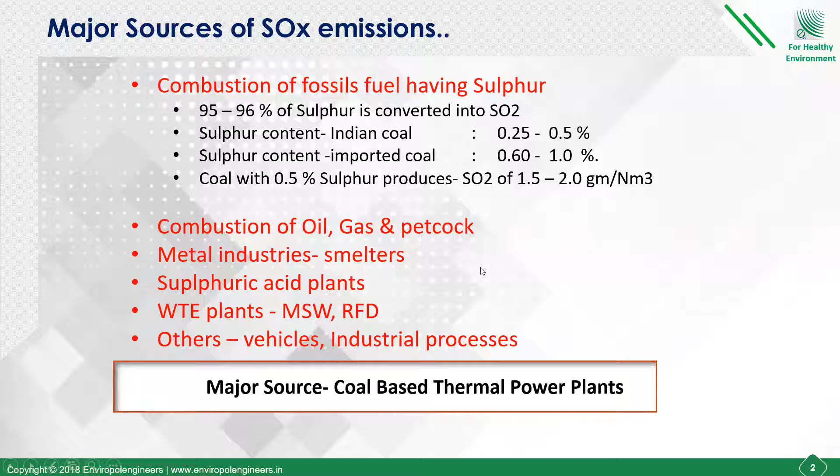The main sources, as I told you, are combustion of oil, gas and petcoke, metal industries from smelter plants, sulfuric acid plants, waste to energy plants firing municipal solid waste or refuse derived fuel. Another source is vehicular pollution and industrial processes.

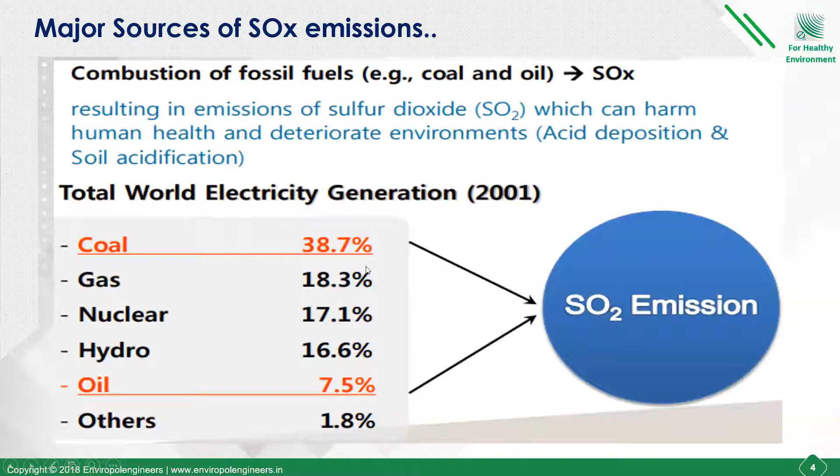And out of this combustion, the major source is coal and oil, which constitutes about 50%, a little less than 50%, around 45% of SO2 emissions in the atmosphere.

Now, how are these SO2 emissions affecting our health or humans? If you see the effect on environment and on human beings from these SOx emissions, you will be surprised that it creates a lot of diseases, a lot of irritants in the human body, and also spoils our monuments and all.

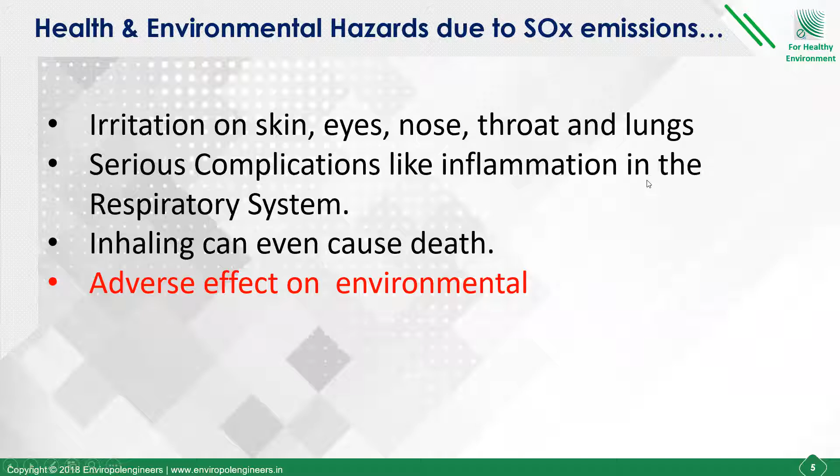The major diseases are irritation of skin, eyes, nose, throat, and lungs. Serious complications are also there in the respiratory system. Inhaling can even cause death if you inhale more than the desired quantity.

It also has an adverse effect on environment. You can see how acid rains occur because of SO2 emissions from the plant, and that spoils our soil, spoils our water table, and has multiple effects on environment.

On human health, if you see the SOx and NOx emissions, both are creating a lot of issues with respect to respiratory illness and cardiovascular illness also.

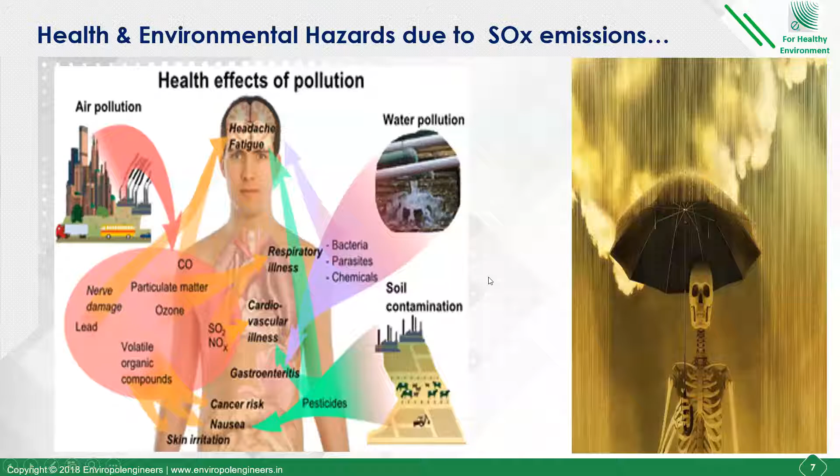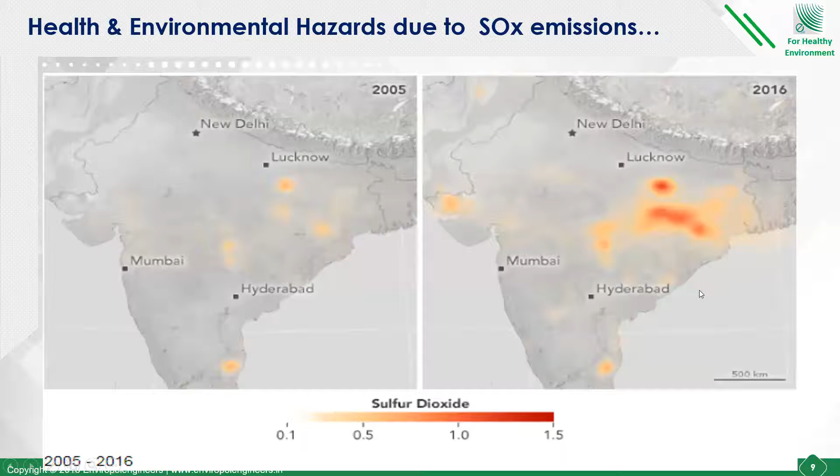If you look at the condition from 2005 to 2016, this data is up to 2016 with me right now, you can see how SO2 spots are increasing, particularly in the eastern part of the country, where there's a cluster of power plants, coal-based thermal power plants, steel plants, the big power generation units. So you can see how from 2005 to 2016 we have progressed on SO2 emissions.

And if we have created this, we have extra responsibility to curtail this and give back the same planet as what we used to have. So the onus is on all our industrialists, all the technology providers, and all technologists to attack this problem and resolve it.

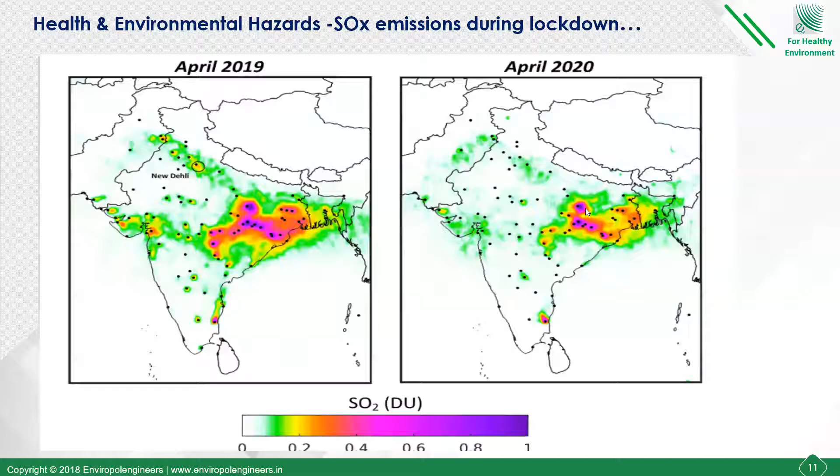Please put your video on, that would be better for us to communicate. I'm seeing a couple of friends from overseas, a friend from Vietnam - thank you, Swain. And from Thailand - thank you, Thitiwat, and all for joining. I know it is an odd time for you in Vietnam, Thailand, and other places, but still you are joining. That shows your willingness to learn new technologies and gain knowledge.

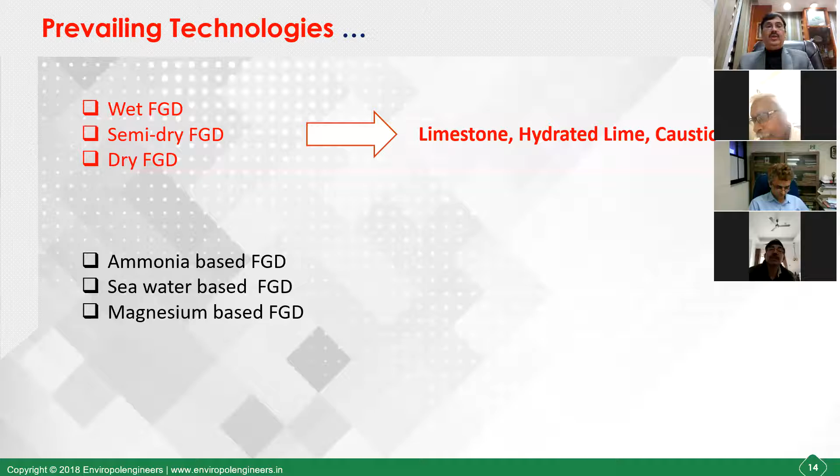If you look at the numbers or stats of type of FGDs all over the world, you find that wet FGDs contribute to about 87% of total installations worldwide, whereas 11% are dry or semi-dry, and 2% are others. On the reagent or sorbent side, 55% is limestone based, 33% is hydrated lime, and 12% is others - others includes caustic, magnesium, or any other sorbent. This is the stats of the world scenario at a global level.

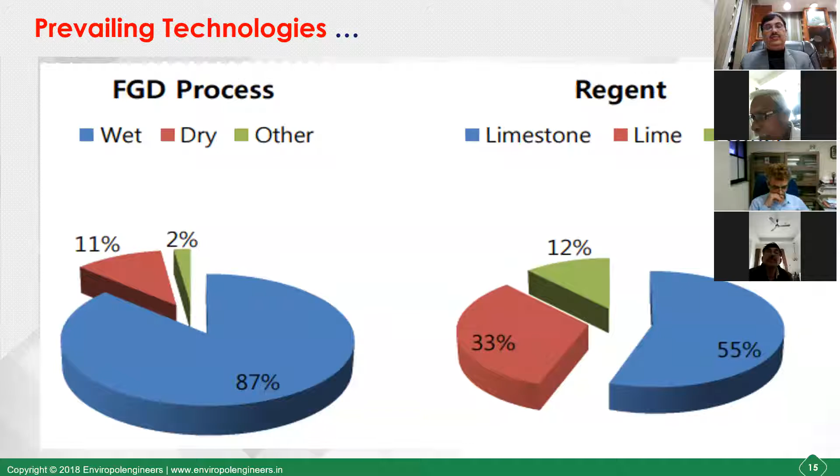If you look at the technologies at a glance and do a basic comparison, you find that wet FGDs are used wherever you need an efficiency of 98% plus SO2 removal, wherever high sulfur fuels are used with coal containing 1.5% or above and a blending of different fuels, and wherever you need a marketable byproduct, because wet FGD is the only system which produces gypsum as a marketable byproduct. Most of these wet FGDs are designed on limestone.

Whereas the other semi-dry type of system is a basic system called SDA, spray dry absorber. Here the efficiency is 95% plus, and it is usually used for fuel having less than 1.5% sulfur content. The dry product goes to landfill, and it normally uses hydrated lime.

The upgraded version of semi-dry technology, which is the most versatile, is called the circulating dry scrubber, or CDS. This is the most popular type of system in semi-dry technology, which can have efficiency as high as a wet system, that is 98% plus. It can be used for high sulfur content fuel. It also has lower consumption of sorbent because of recirculation of sorbent back to the system. The dry product is again landfill, same as the SDA, and this also uses lime or hydrated lime for absorption of SO2.

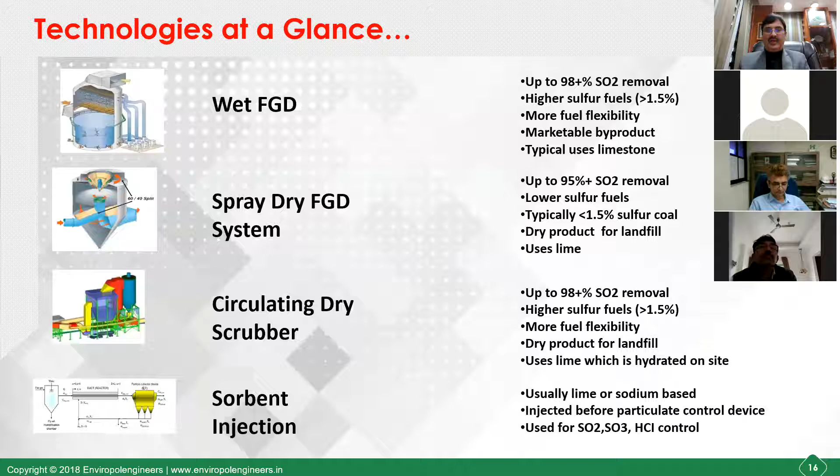So this is the very basic comparison of these four types of systems. But when you really sit with this, it is very difficult to select which one to use where. It looks very simple, but when you work it out for a particular plant, there are so many variables that come into the picture and create confusion among users about whether to go for wet, dry, or semi-dry. So we are trying our best to reduce or minimize that confusion today, so that your selection criteria becomes very clear.

So I would just give you a little bit of the brief about every technology, especially on wet.

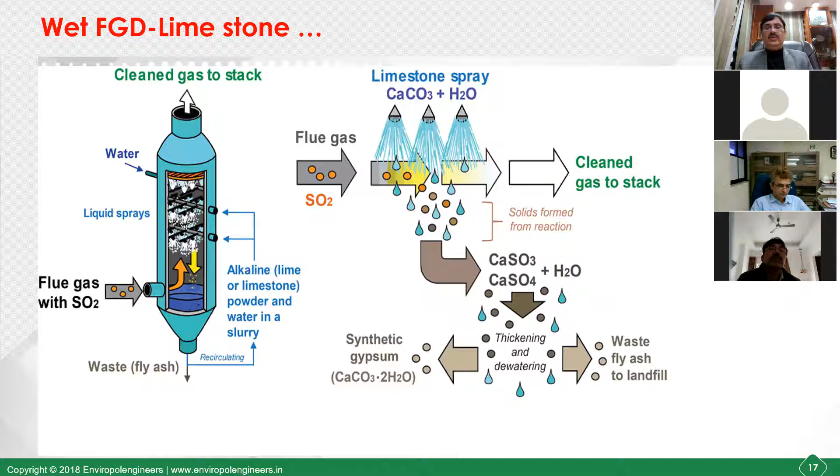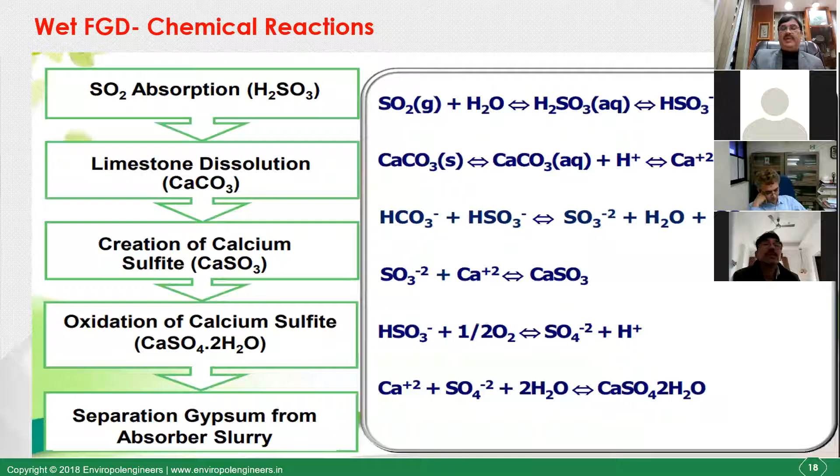If you look at the chemistry step by step, you can look at these equations. First is the absorption process, where the SO2 reacts with water and gets converted into HSO3. Then there is limestone dissolution which takes place in the form of CaCO3, the limestone, and then creation of calcium sulfite, CaSO3, is formed. Then CaSO3 is converted through oxidation in the bottom chamber, which is called the oxidation chamber or reaction tank. After the oxidation, the gypsum is separated and dewatered through a dewatering system, becoming a saleable product for you, and the clean gases go to the demister and back to the stack through a booster fan.

So friends, if you see the absorber chemistry, it is very simple. That limestone, the calcium CaCO3, is reacting with sulfur dioxide, converting into gypsum. That is the crux of the whole chemistry.

But if you look at the finer point of this equation, you find that particle size of the solid limestone particles is a very important criteria here. The finer the particles, the better the reaction, because you get more surface area for absorption, correct? And then reactivity of limestone, that is nothing but the percentage or purity of CaCO3 in the limestone.

That gives a better dissolution. And the pH value of the absorber slurry, you need to maintain a certain pH value in the recirculation slurry system. The lower pH leads to faster limestone dissolution, but at the same time, higher pH also creates problems of scaling and other things. So there has to be a perfect balance, and this is one of the most important control parameters of operating a wet FGD system.

So if you look at this, high pH value is good for the absorption efficiency, but at the same time, the dissolution rate of the regenerated limestone reduces and also creates scaling issues in the system, correct? Whereas the low pH value is detrimental to removal efficiency, but beneficial for limestone dissolution. So these are two reverse things against each other.

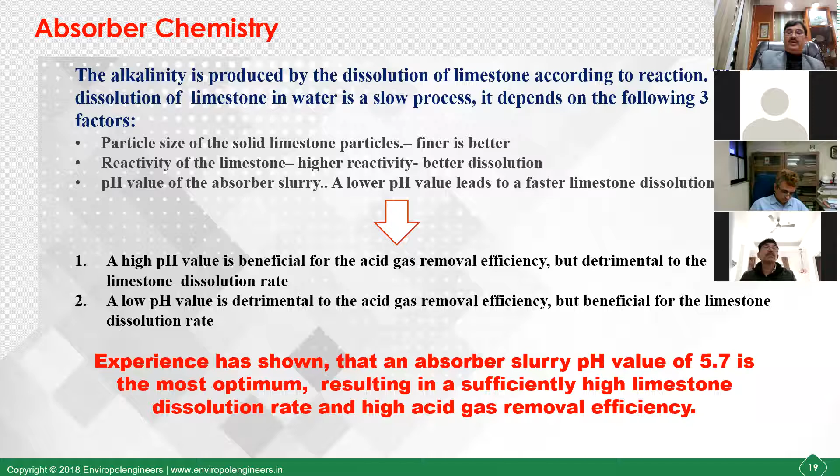So I hope you are clear on this. Let me take you to the wet FGD system components, or what we call islands. One is the main unit, the absorber, which is normally made of rubber-lined carbon steel or glass flake lining because of the pH, or sometimes duplex steel, depending on the budget and the life expected from the system.

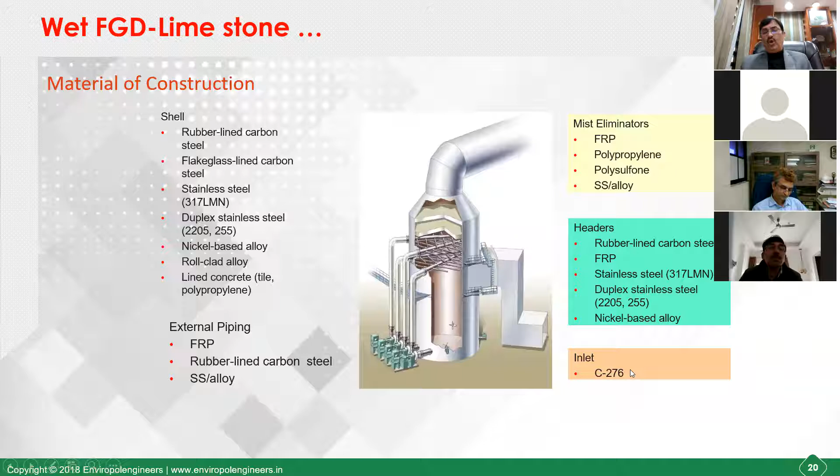And then pipings are normally in non-metal or high-grade SS. Mist eliminator can be in FRP or high-grade SS. Similarly, the headers, and normally this Hastelloy is being used in all the projects of NTPC, the Hastelloy lining, which is called C276, a very costly material. But for the life, the Hastelloy lining is being used in the absorber.

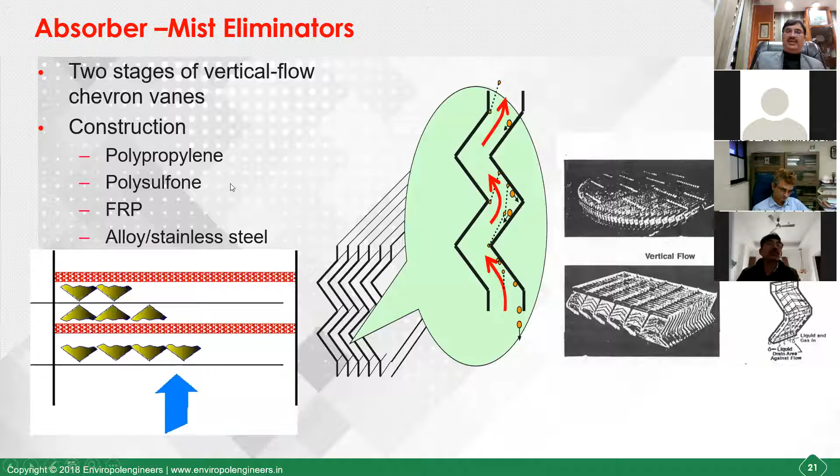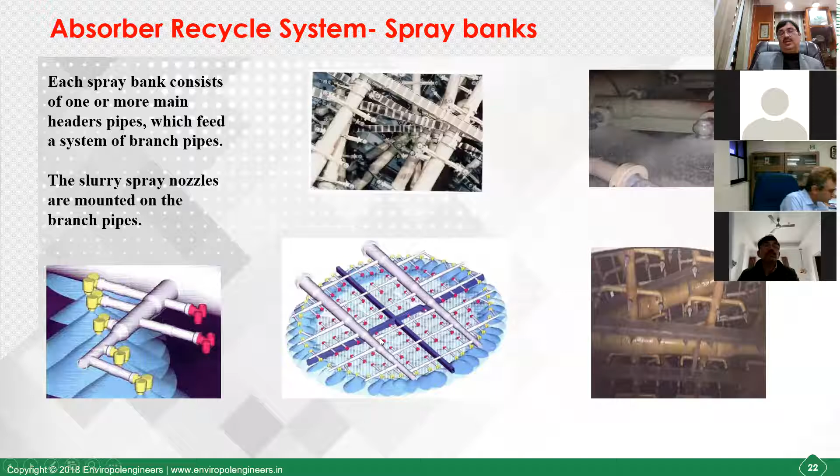Normally, after the ESP, after the particulate matter is removed from the gas stream, a booster fan is used, and the gas goes to the absorber, and from the absorber it goes to the chimney directly through the demister. And the bottom part has a reaction tank, which is the absorber tank, where we maintain some retention time for the reaction to take place for proper conversion and crystallization of the gypsum material.

So normally 3 to 5 minutes of retention time is required here, and this is pumped to the hydrocyclone for dewatering, followed by a horizontal vacuum belt filter for removal of gypsum, or dewatering of gypsum and disposal of gypsum.

And then the filtrate from this is taken back to the absorber tank, and there is some amount of air present here, called the air oxidation blower. The air is given for oxidation purpose to convert CaSO3 into CaSO4 and then into gypsum. Some amount of this slurry is taken to the bleed, and the parameter which controls the amount of bleed is the chloride content and the solid content in the recirculation path.

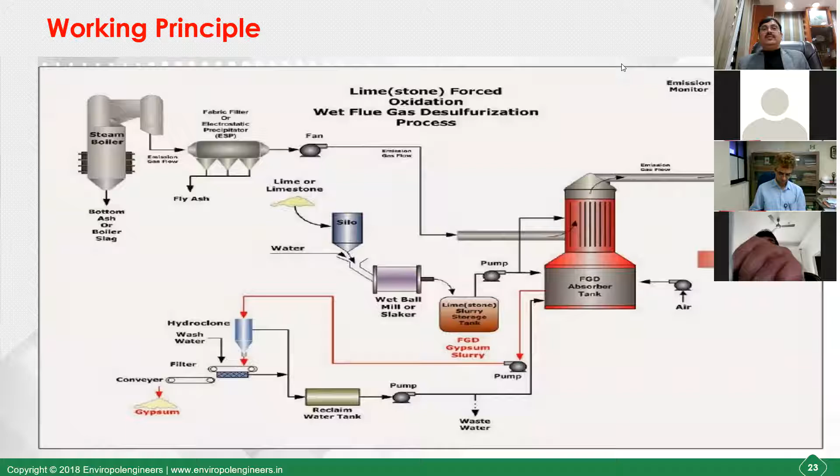So if you look at the individual island, the first is the reagent preparation island. As I showed you, it has got a day bin, a ball mill classifier, ball mill, and then a feed tank for preparation of slurry. Normally a 20% solid concentration slurry is prepared and fed into the absorber tank as a regeneration of the existing slurry.

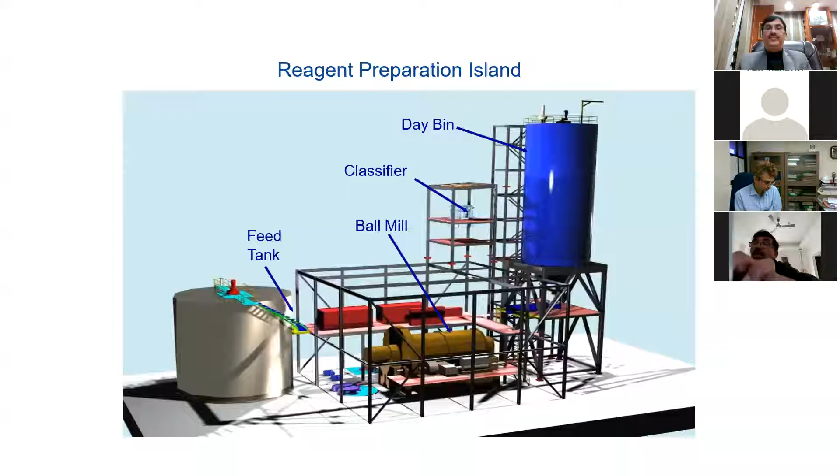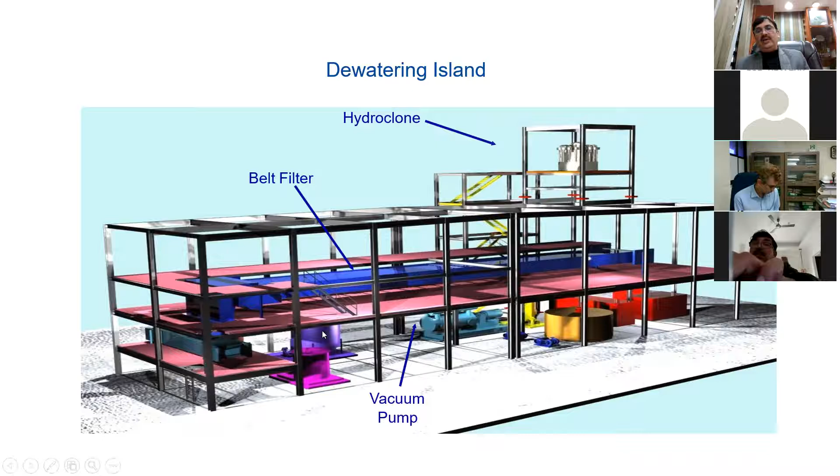Coming from the scrubber. The other islands, one is the absorber island, one is the reagent preparation island as I showed you, and the third island is the dewatering island, which dewaters the gypsum and then disposes it off through an HVBF belt system, vacuum belt system, and hydrocyclone.

As you know, there are multiple uses of the gypsum which is sold in the market. It can be used for wall board, cement, plaster of Paris, soil conditioning, and as a hardening retarder in Portland cement. So multiple uses are there, but it depends on the quality of gypsum you are producing, and the moisture content of the gypsum. Accordingly, the price in the market is decided.

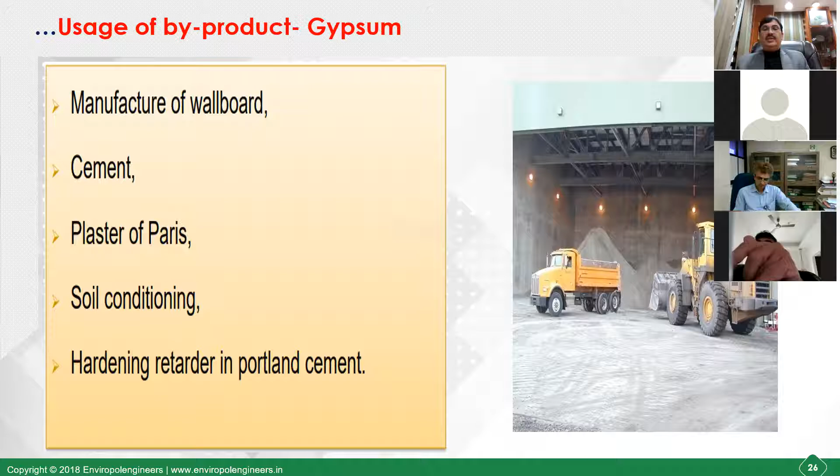And if you have a good quality, you get a better return, which can compensate some amount of your capex over a period of time.

And as regards the control system of the whole wet FGD, first is the wastewater treatment. As I told you, the control of solids as well as the control of chloride defines the wastewater treatment quantity, or the bleed.

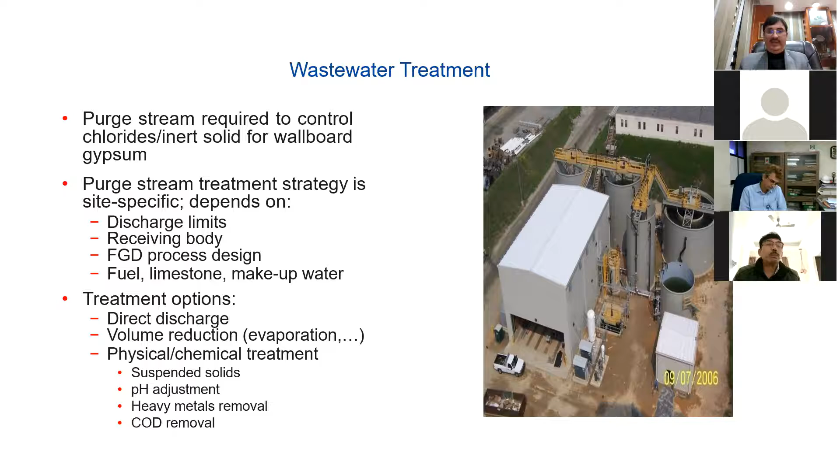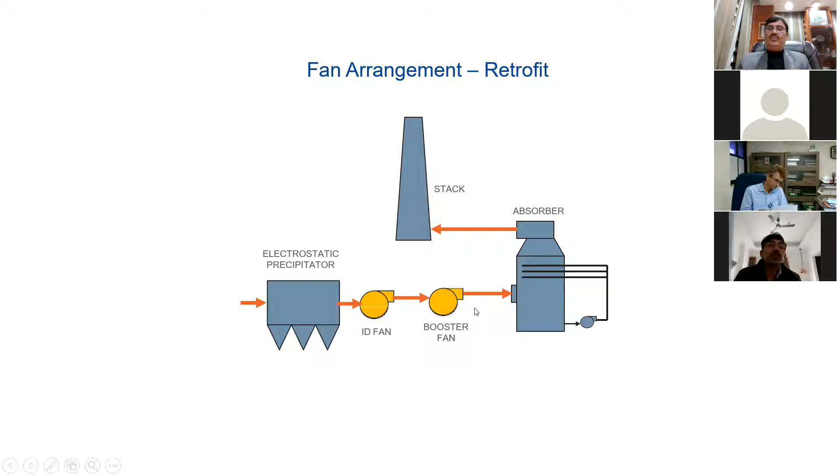On the control side, you have a dedicated DCS or PLC based system normally. The control points are: first, draft control using a booster fan, so that your boiler is not affected because of the extra pressure drop created. The fan can be before the absorber or after the absorber, depending on the layout and many other factors. The location of the booster fan is decided based on these.

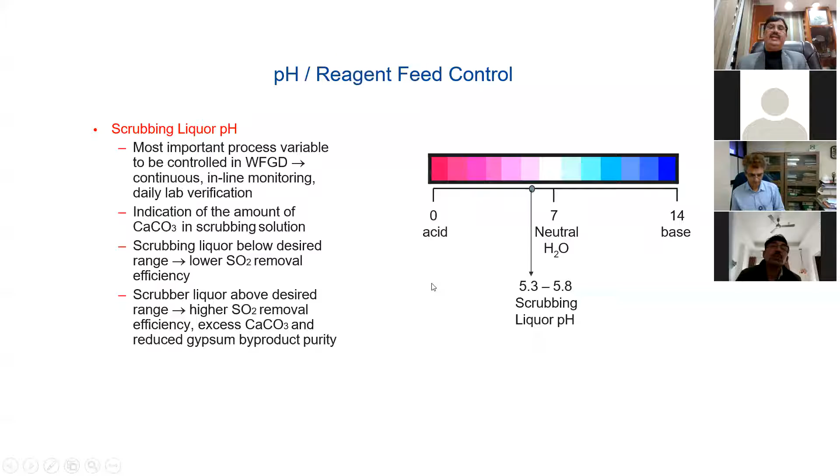Then you have scrubbing liquor pH control, which is a very essential and critical component of the whole wet FGD system. You have a set parameter of 5.3 to 5.8 pH, maintained by controlling the recirculation rate and the rate of regeneration agent. And then you have gypsum bleed solid control.

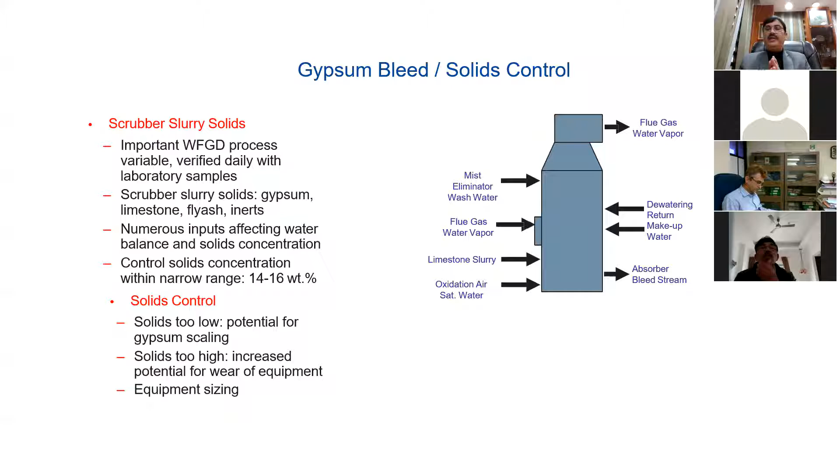If solid is too low, there's potential for gypsum scaling. If solid is too high, this increases the potential for wear and tear of the equipment. So there has to be a specific range of solid concentration, which varies from 14 to 16% by weight. This solid concentration is to be maintained in this range.

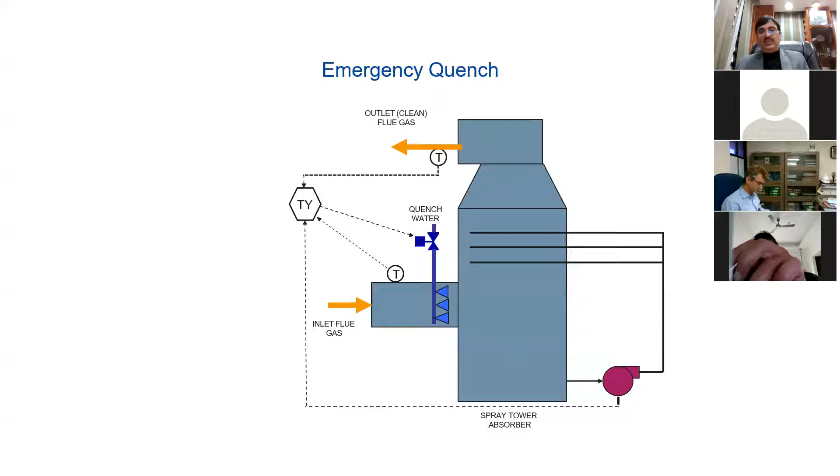So if I summarize the wet FGD, it is the system most commonly used for high-size power plants, because the OPEX here is the minimum, particularly for the sorbent operation cost. The major islands I've already explained: the absorber, reagent preparation, and dewatering. And the key balance of plant equipment is flue gas handling, material handling, wastewater treatment, and electrical and control instrumentation. Friends, so far this is what wet FGD is, and I hope you have learned something.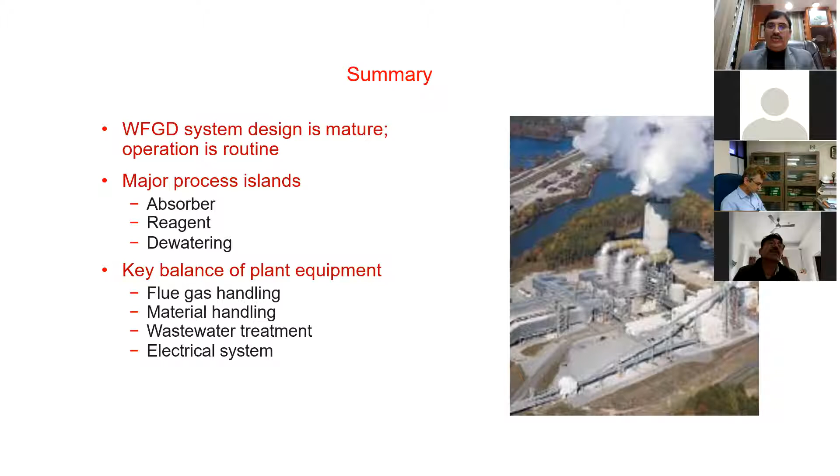Today we will know more about the semi-dry FGD systems, which is also known as multi-pollutant control technology. As we know, FGD systems are also known as post-combustion abatement systems, SOx abatement systems, where the reduction in sulfur dioxide and sulfur trioxide takes place after the combustion of the coal, sulfur-added combustion of the coal.

In the semi-dry FGD technology, today we will discuss two kinds of technology. Number one is the spray dryer absorber or spray dryer system, and the next one is the circulating dry scrubbers, or we can call it CDS.

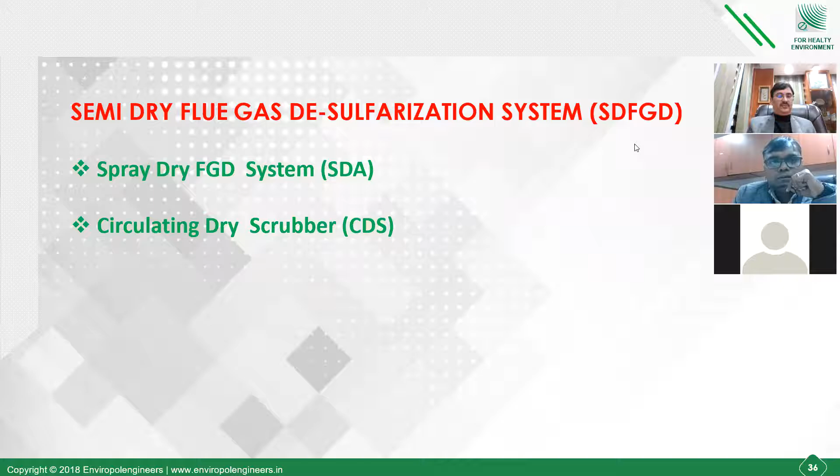So now let us move to the next slide. So friends, as we discussed, today first we'll discuss about the SDA, and the pattern of discussion will be that first we will discuss the islands of this technology, then the working principle, and then what are the features.

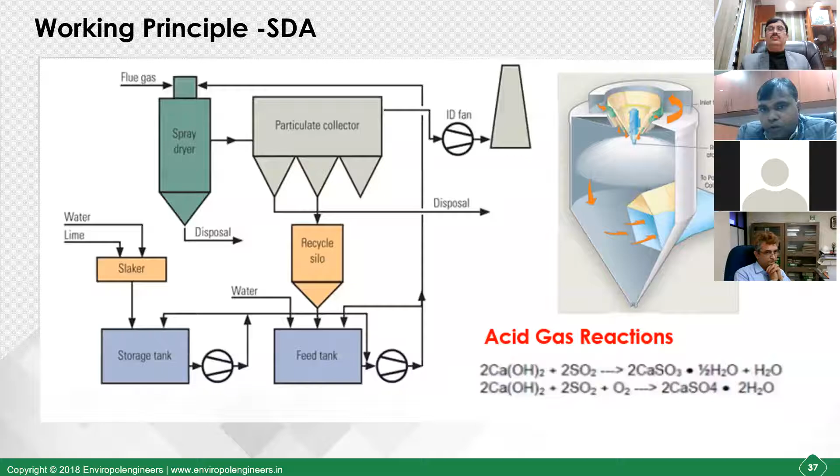So friends, in broad terms, this is the working principle of this technology. Now we will move to the next slide.

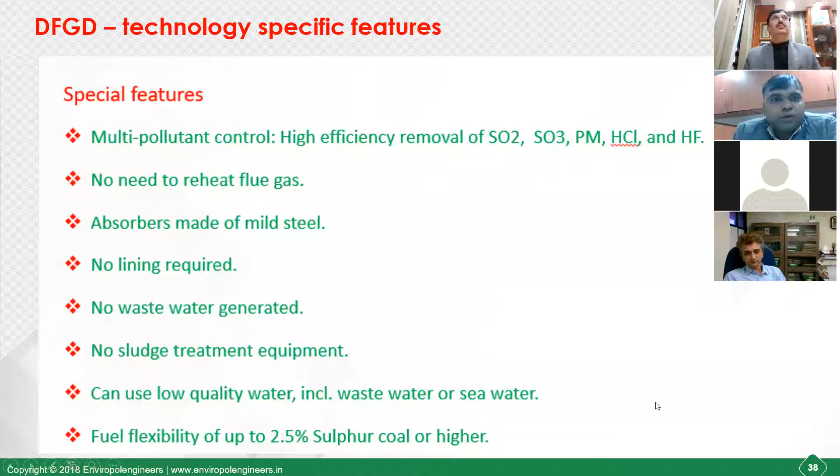So friends, as we know, circulating dry scrubbers are well known in the market, and these scrubbers were developed in the 1980s in Germany. The majority of installations are already available in the US, Europe, China, and of course some installations are available in India as well. A few installations are under execution, and some cases are under discussion also.

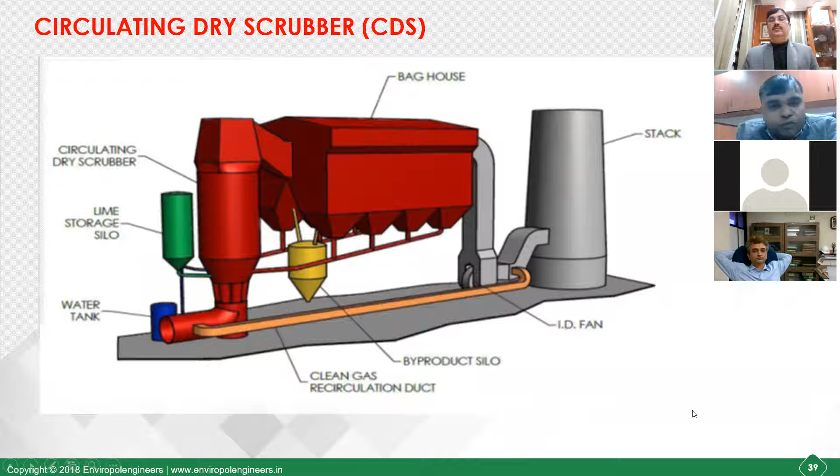So what happens? Lime is transported in bulkers, which have unloading blowers. Hydrated lime is unloaded through the blowers and stored in the hydrated lime silo. This silo has its own accessories like vent filters, a fluidizing system, and so on. The sizing of the lime silo depends on the number of days we are looking for, the efficiency we need to achieve, and that is based on the stoichiometric ratio, purity of the lime, and feed rate in order to achieve the efficiency.

And just below this lime silo, there is a gravimetric feeding system. Based on this gravimetric feeding system, we are going to weigh and inject the calculated amount of hydrated lime into the scrubber, based on the efficiency that we'll discuss in the upcoming slide.

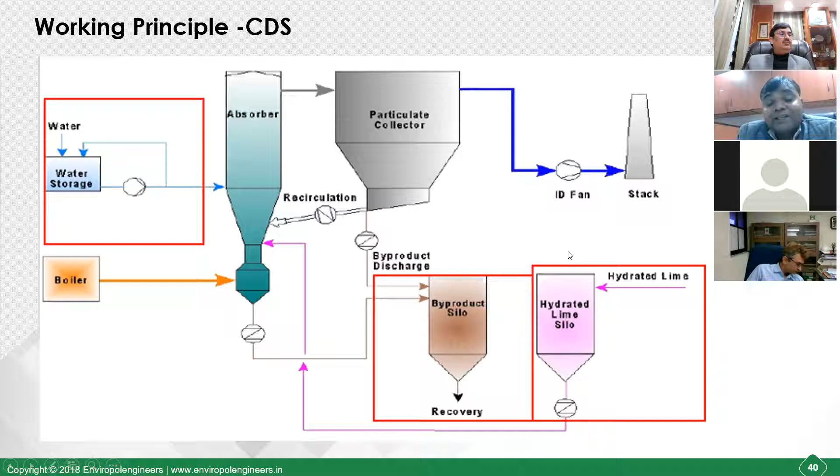The majority of the solids will be recirculated back with the help of the recirculation air slide, and a few of the dust or byproduct is again recirculated back to the discharge silo, because we need to maintain a bed. The clean gases are allowed to leave into the atmosphere with the help of the stack and ID fan.

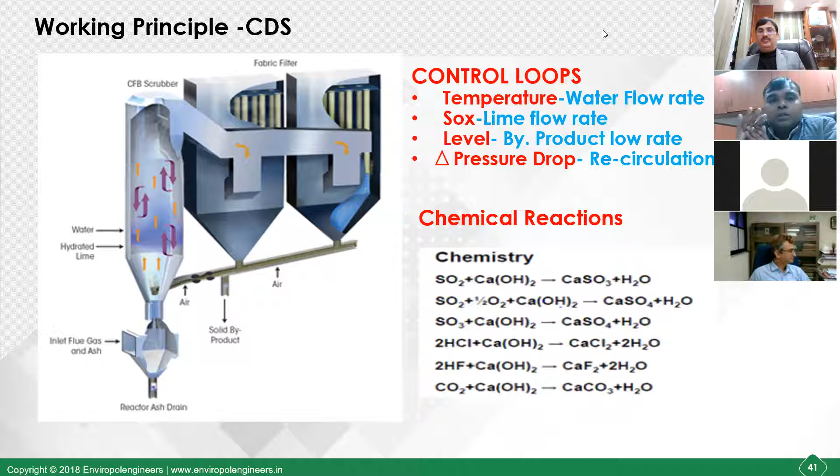Apart from that, during this process, this technology will further reduce other gaseous pollutants like HCl, HF, and of course CO2. Now let us move to the next slide where we will discuss the salient features of this technology.

As we discussed, this is the circulating fluidized bed, and this system is working on the fluidized bed principles. Of course, there will be high efficiency that we can achieve, over 97%.

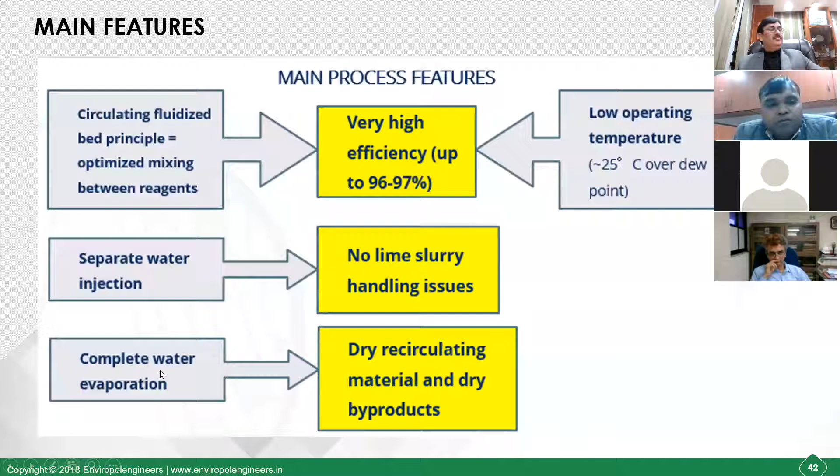And there is a separate water injection. There is no problem like that. There is a slurry formation, but there is no separate lime slurry handling issues. Next is complete water evaporation, so whatever water we inject will be evaporated completely. There is no slurry formation at the bottom of it.

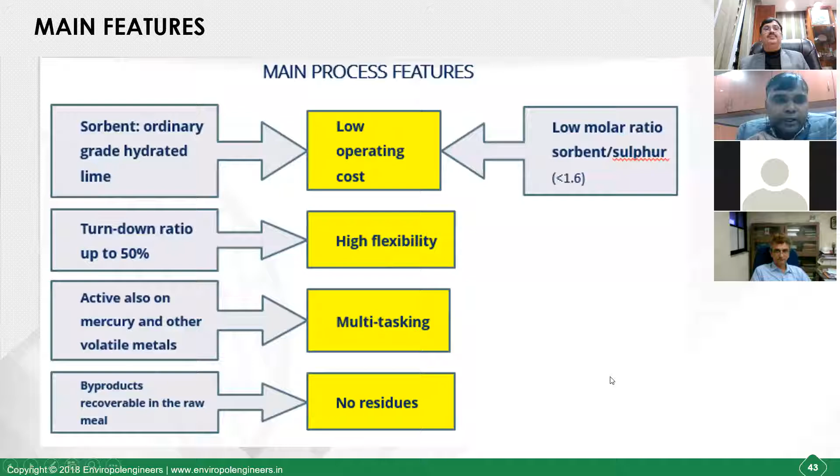Thank you. Next is the low operating cost, because we are using ordinary hydrated lime, and the turn down ratio of this technology is around 50%. If the boiler is operating less than turn down, then we utilize the clean gases after the outlet of the ID fan, and we recirculate these gases in order to maintain the turn down ratio.

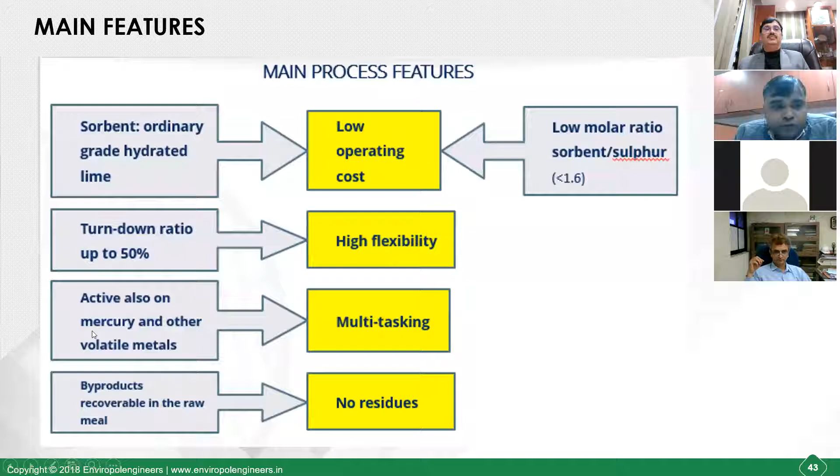Apart from that, we are going to control the mercury and other volatile metals. So friends, with this technology, we understood that this is a well promising technology where we address other gaseous pollutants as well as particulate matter.

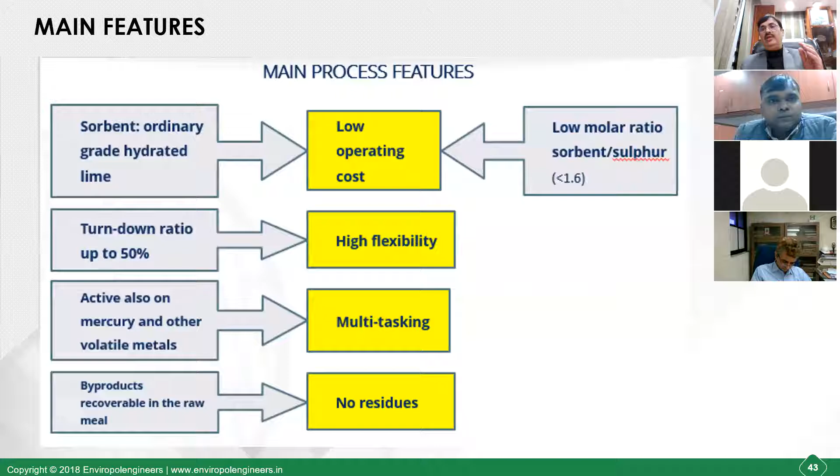So with this, I'm going to hand over these slides to our CEO, sir, to proceed further. Thank you, Narendra, thank you very much, for explaining these semi-dry technologies, which are very important for smaller type of power plants, particularly CPP and process boilers. I hope it is going to get popular in India as well very soon.

Couple of plants are already in process of installation and commissioning, up to 100 megawatt or even more than 100 megawatt, 200 megawatt. But our focus is going to be on process boilers or CPPs, captive power plants, to devise the most economical system, a hybrid system or an independent dry or wet system, and to come out with an economical way of reducing the SOx.

So friends, now you have come to know about the wet FGD technology. In semi-dry, we know SDA, and we know now the CDS, the circulating dry scrubber. DSI we are not discussing much here, because DSI is useful whenever you have a very limited requirement of efficiencies, up to 40-50%. DSI is the most simple system.

It is fitted between the ESP and the boiler, and it is a direct dry sorbent injection, mostly using Na2CO3, or sometimes lime is also used. We are not discussing that in detail, because it is a very simple and basic system up to 50% efficiency.

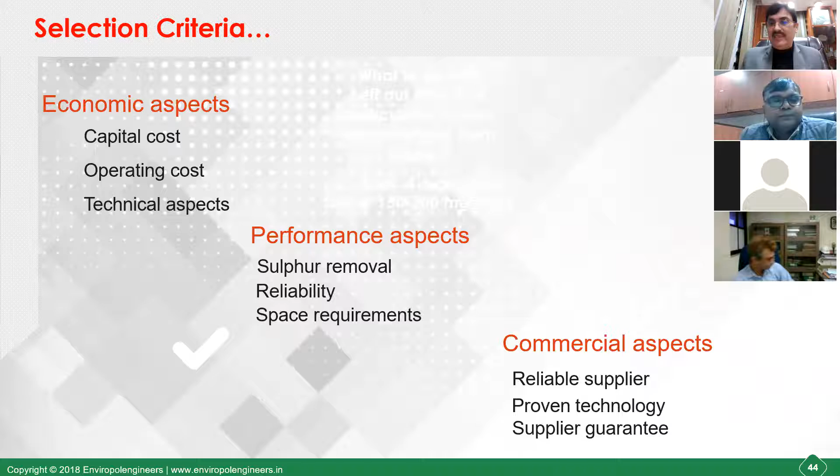If I say all these three technologies, which we have explained in detail, they are quite established and proven globally. But in India, we are just beginning to control this SOx element on boilers, so many people may not be aware. That is the reason we are coming forward to create that awareness among people so that the selection becomes easier. I will quickly run through and try to summarize the whole thing.

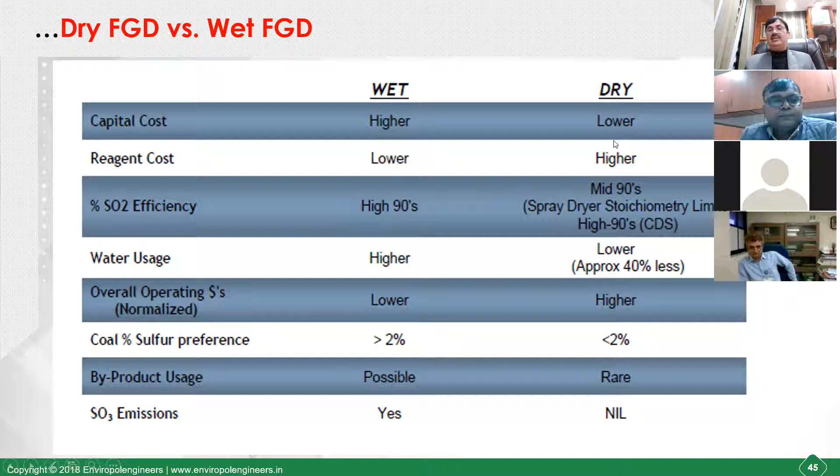As for byproduct, wet systems produce gypsum which is marketable, while in dry systems it is mostly used for landfilling so far in India. Wet systems also have SO3 emissions, whereas dry systems have nil SO3 emissions.

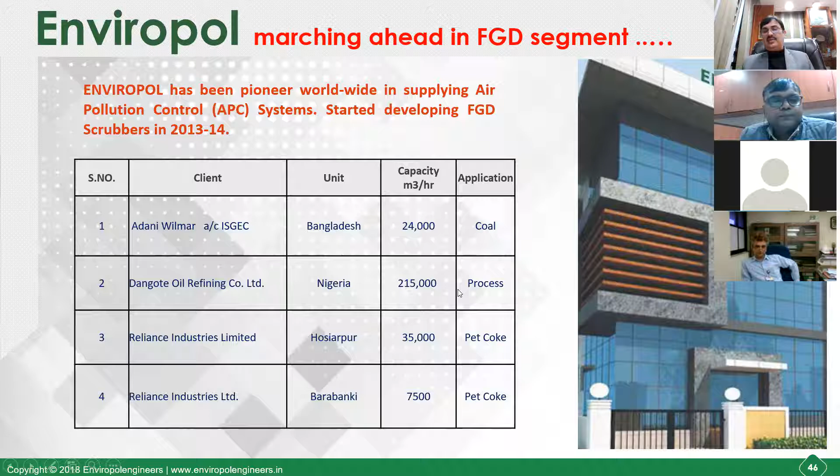As far as Enviropol is concerned, we have experience doing 4 projects of different kinds. The latest in this series is a caustic scrubber being done at Dangote refinery in Nigeria, a process FGD with 215,000 meter cube per hour of gas flow.

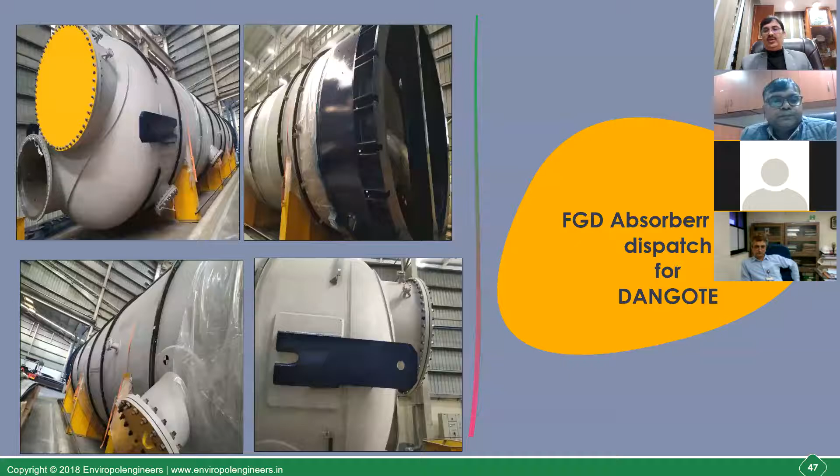These are a couple of photographs. I'll run through them so you're aware of the sizing and type, and can correlate with your plants. This is the absorber - you can see its size for a caustic based scrubber for Dangote. This is for a small petcoke fired boiler, a 30-ton boiler at Reliance.

We had a completely in-house technology developed with a venturi tray, using caustic as well as lime - a dual alkali system for smaller boilers having very high input concentration of SOx. It was designed for petcoke where the input was 7,000 milligram, and we achieved an outlet of 197, using an in-house designed low-cost solution where the venturi section operated on lime and the tray scrubber operated on caustic.

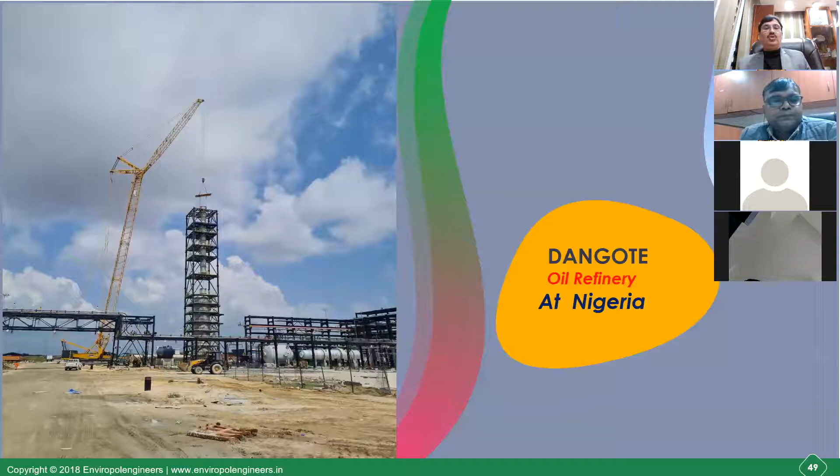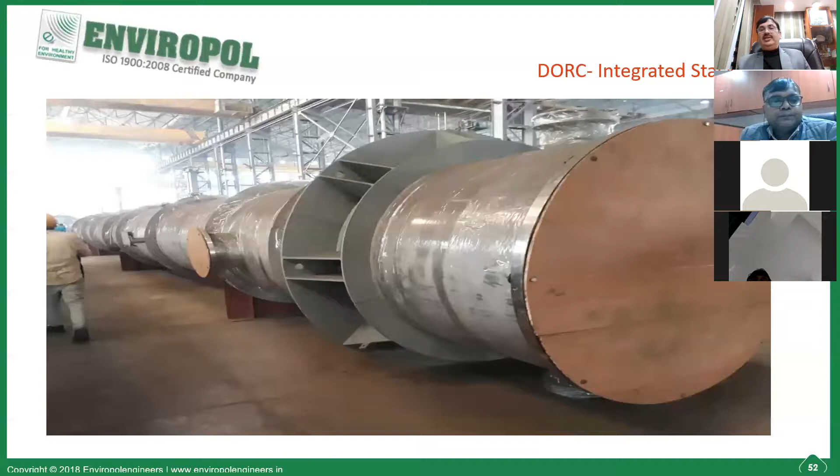This also had a reheater in the form of a steam reheater on top of the scrubber. This is the project under installation at Nigeria, and this is the absorber - a big absorber of 60-meter height. This is the photograph of the absorber under dispatch to Nigeria. This is the stack mounted on the absorber itself, and this is the sorbent tank under dispatch.

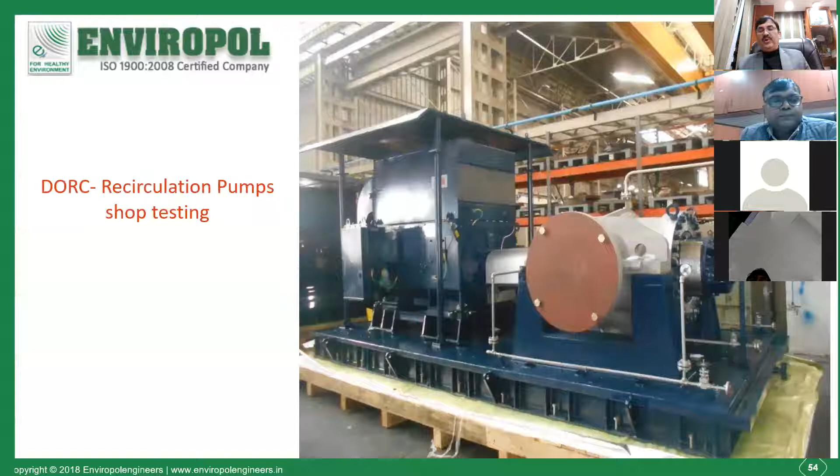Recirculation pump for the caustic scrubber. This is the dual alkali system I was talking about for the petcoke fired boiler, where we have a venturi scrubber - a variable throat venturi with the lime solution - followed by the multi-stage tray scrubber with a reheater operated on caustic.

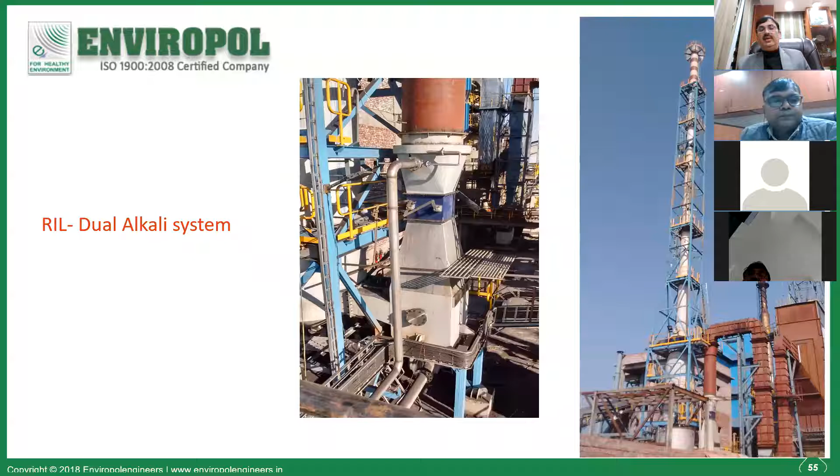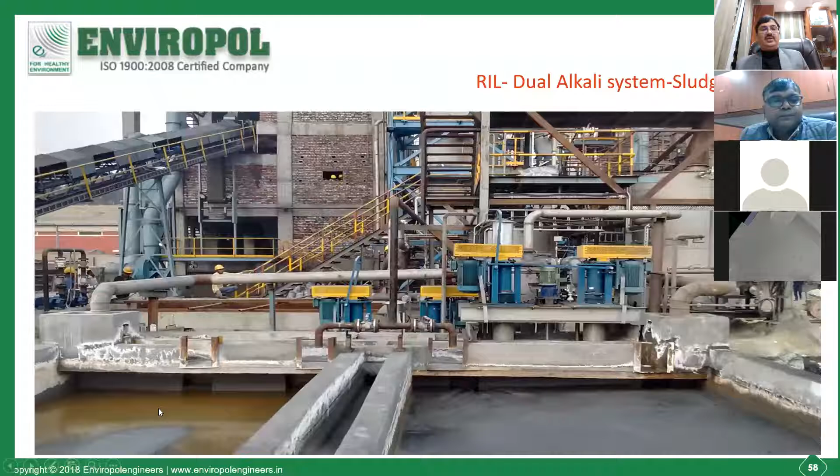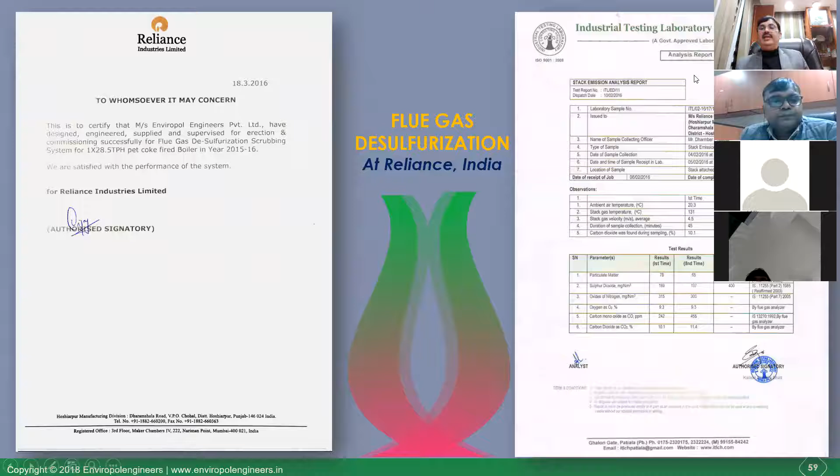These are all the diagrams, and you can see some running photographs. This was based on a sludge ash pond, with no recovery - one side has caustic based effluent, and the other side has lime based effluent. This is the Reliance certificate performance and testing data. If you look at the testing data, we got about 197 milligram of SOx emissions.

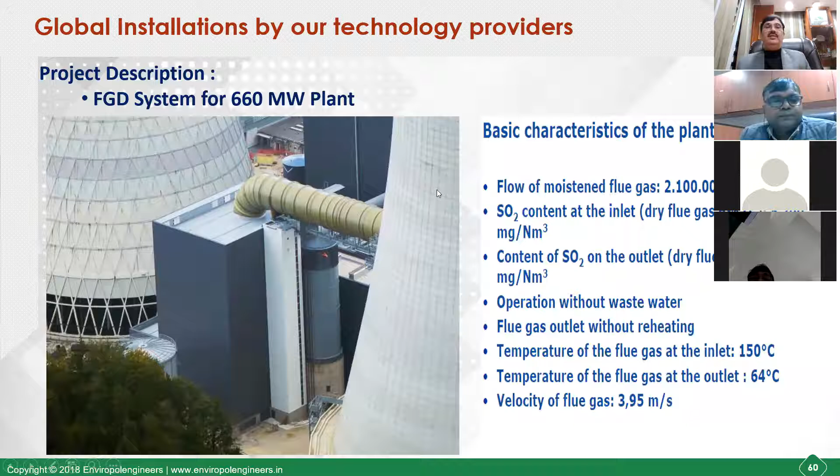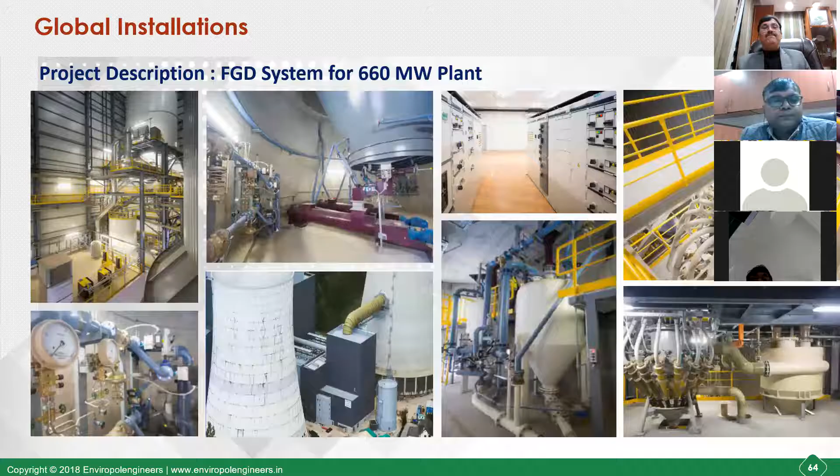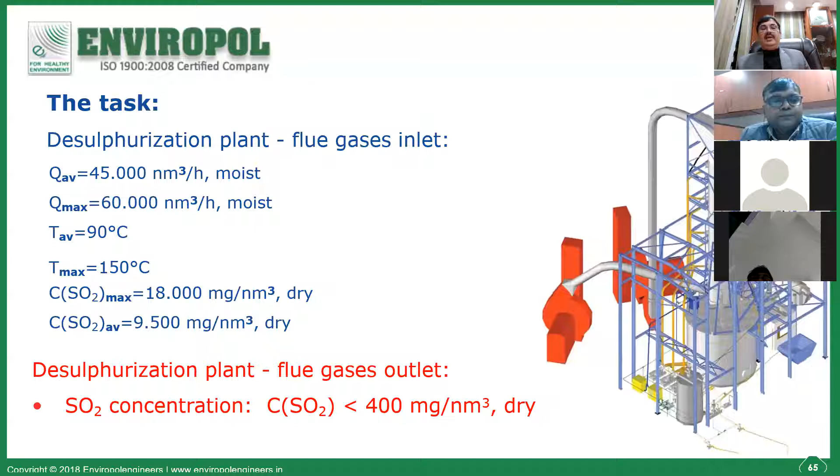We have a global partnership with a European company on wet and dry FGDs for bigger plants. This is a photograph from our counterpart for a 660 megawatt plant in Europe, and another for a process plant - a lead manufacturing plant with 45,000 meter cube per hour of gas flow, where the SO2 concentration was less than 400 milligram per nm cube.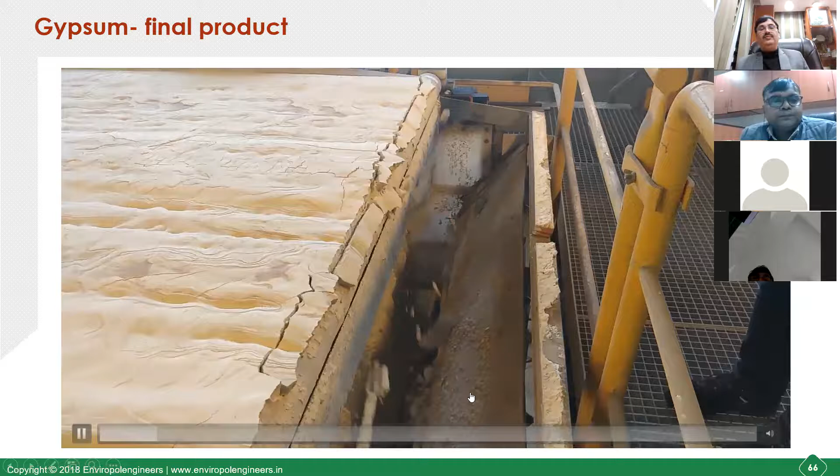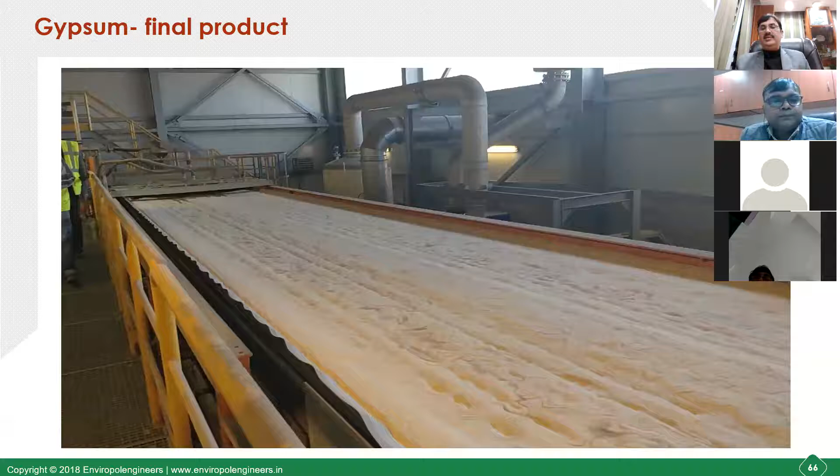You see how the gypsum is produced and dewatered on a horizontal vacuum belt filter - I'm just running this video. This is the gypsum with a moisture content of less than 10%, which is readily marketable from a wet FGD plant.

But having said that, the selection of a particular technology for a particular plant is not so easy - there are so many variables. So my recommendation for all of you would be to consult an expert when deciding on a particular technology, because there are plenty of variables that decide the operating cost and capex for the complete system. Once you select a wrong or inadequate technology, you have a problem forever.

My recommendation would be to contact an expert, a consultant or supplier you trust, who can make a feasibility study comparing all types of technology for capex, opex and life, and then take a call. It is not easy to select one. These are the basic parameters to keep in mind when discussing even with an expert or consultant. Unless you as an operator have good knowledge of these parameters, you will be totally dependent on the other person. So my recommendation: you should know everything, but still have a second opinion or hire a consultant for selecting the right technology.

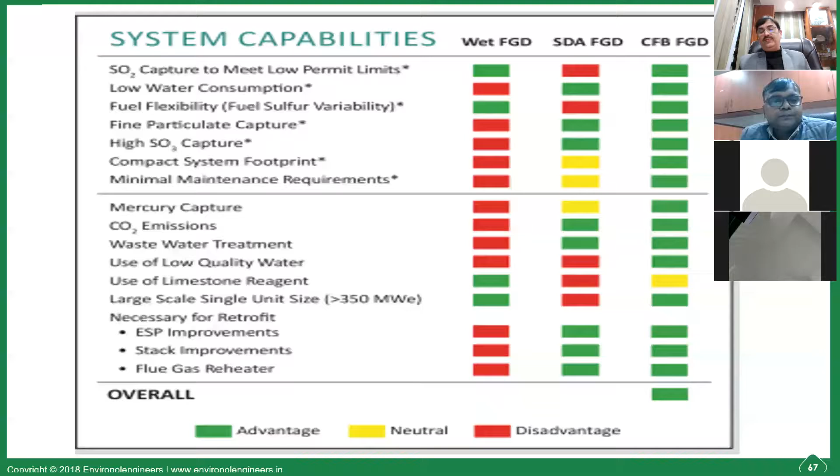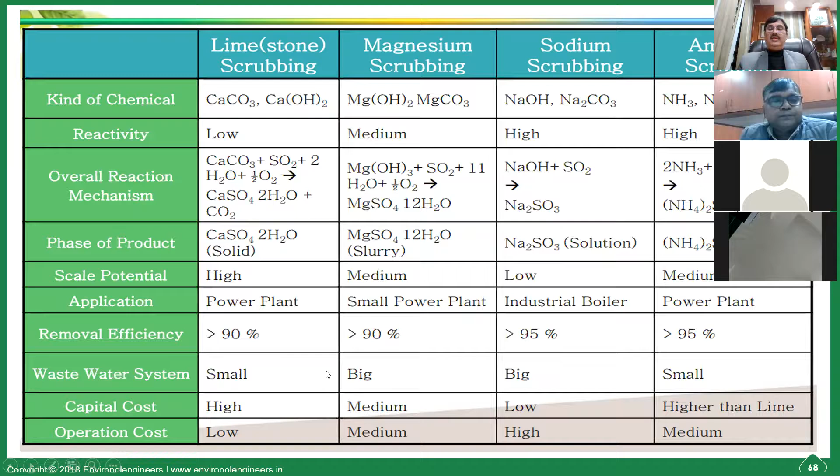In conclusion, the FGD process is a reliable process already proven to reduce emissions. These three are the most prevalent and established technologies, as we have explained. Nothing to worry if you select the right partner or technology provider. The key is to select the most adequate technology out of these three based on the parameters given to you at a glance for a first step study, and then hire or contact the partner or consultant you trust for vetting that selection before going ahead with the particular technology. So the selection requires a careful study.